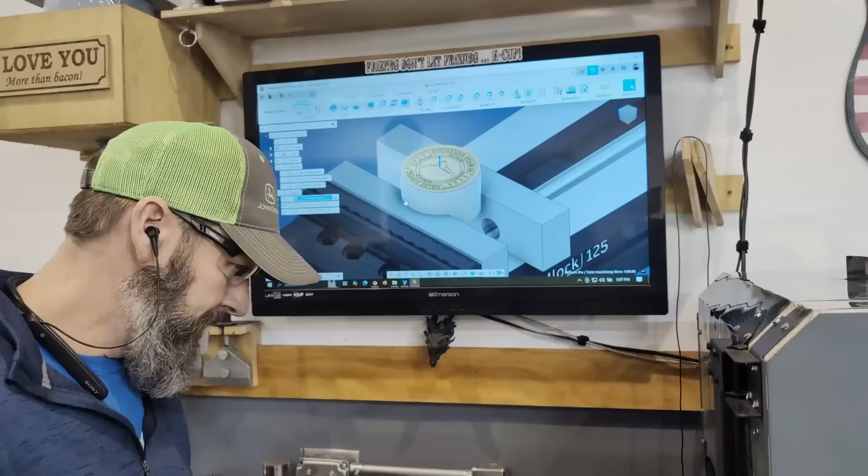Onboarding with Xometry. I'm giving Xometry a try. I'm just through those initial hurdles of becoming a partner, doing my test part, becoming a partner, getting onboarded, and I thought I would share my experience. I took a few notes, a few talking points, so I don't ramble on and waste your time. There's a few things here on the computer and some test parts that I want to show you that I think will be beneficial.

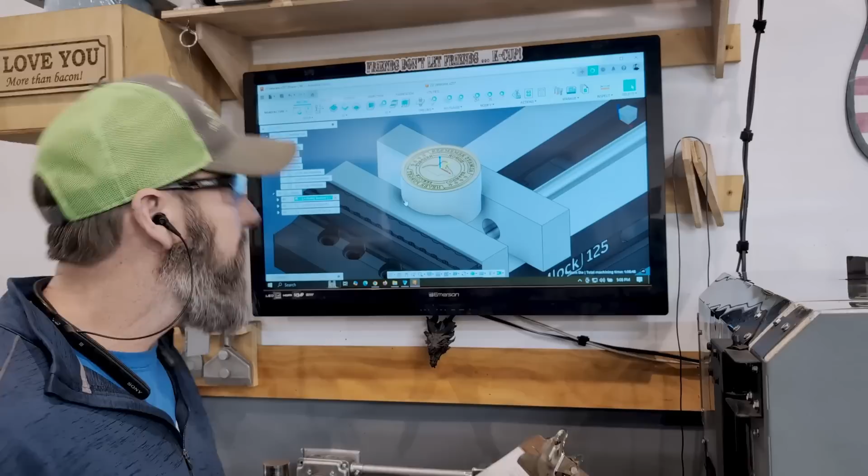So first part is signing up, the process. I didn't find that overly difficult. I just went to their website, xometry.com. Now, some people say Xometry, some people say Xometry, I don't know, it's one more syllable to say, so I just say Xometry and skip to the end. But yeah, I went to xometry.com, applied as a new member for 3-axis machining, and everything was very straightforward. I'm not going to go into the process.

It was very easy. Why? Well, at the time that I started this, I had a lot of available or free spindle time. I hadn't ramped up to now. So this was over the summer. I decided it was actually the same time I did 75 Hard. So I was gung ho. But I decided, I'm going to give Xometry a try.

I've got a lot of free time in the shop, and I could use that to make some cool parts and to make a little extra money. Fast forward to now, I'm in full swing. I feel like I've been forging and making things to sell in my Etsy shop nonstop since October. So that's why I decided to at least give it a try.

I've heard a lot of people say you can't make any money with Xometry. I've heard a lot of complaints, and it's really hard to believe what you hear from other people or on the internet unless you see it for yourself. There are always two sides to a story, right? And some people are successful with it.

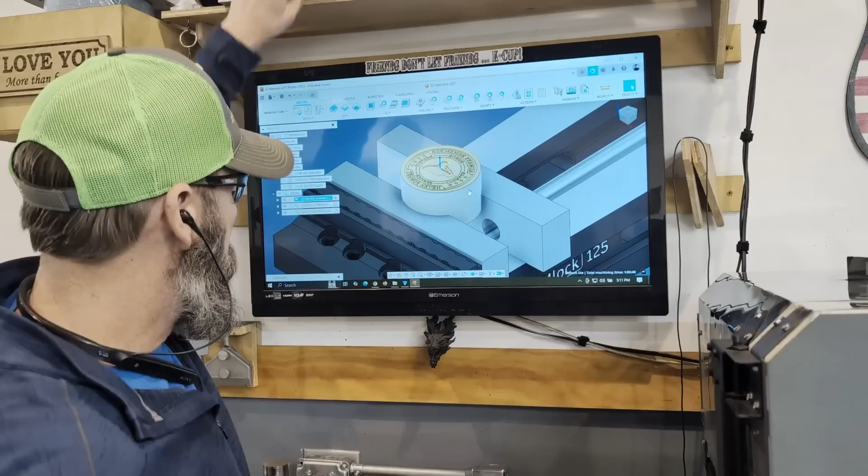So I was just testing out my speeds and feeds. This is a throwaway piece of aluminum I had. After that, I went back to my CAD and CAM and refined what I thought I needed to do with the process. Now, I think I have it up here.

There are some critical dimensions that they call out. This is the final inspection sheet. Green is good, by the way. That means I passed. This is the inspection sheet that they provided to me after I passed the part. So this is what the final part looks like.

And some of the critical dimensions are, for example, this is a through hole here in the center. That had to be, I think it was 1.188 inches, plus or minus 1 thou.

And then these are 1/4-20 cap holes, nothing big. That was super easy.

What I was really worried about was the roughness average, the surface finish called out on this part. I thought, well, if I get brand new inserts and really dial in my Fusion speeds, using a 50 millimeter face mill, 2-inch face mill, maybe I can get it. And I got it. I was a little surprised, but I got it. But I was really worried about this.

So this whole time, maybe let's think of this later in the conversation, but my biggest worry at the time was actually passing this part, getting the surface finish, and then all edges broken in the mill.

So you have to get a little creative with this one. There are several ways you can do that. I ended up going, I can't remember what it's called, I did a trace. Yeah, under Fusion 360, under the 2D toolpaths, I ran a trace. I think I ended up running it with an 1/8 inch or a 1/4 inch ball mill, because as that end mill is going and navigating along this contour, the tool geometry is going to change ever so slightly, and that was the least catastrophic. It still broke the edge, but I was able to dial that in. Worked pretty well otherwise.

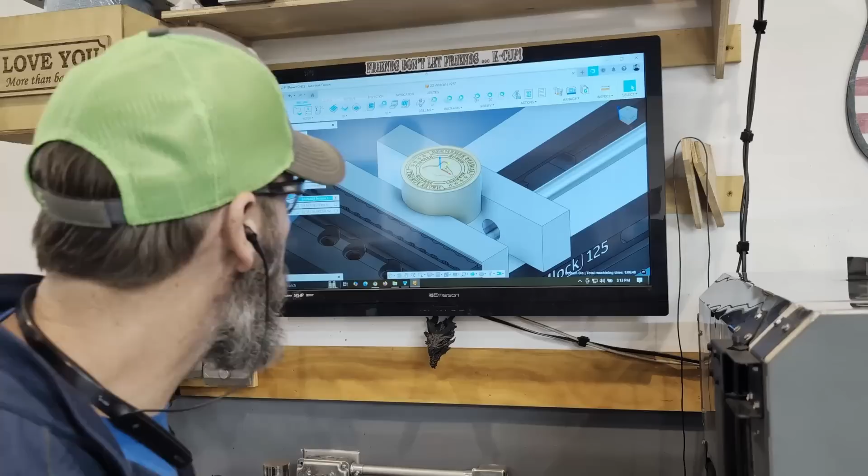And then on this particular part, I flipped it, put it back in the vise, and was just off ever so slightly. I just have just the tiniest little edge, and I hate that. I hate it when you have to flip a part and find it just perfectly. So that didn't work, so I had to come up with a different strategy.

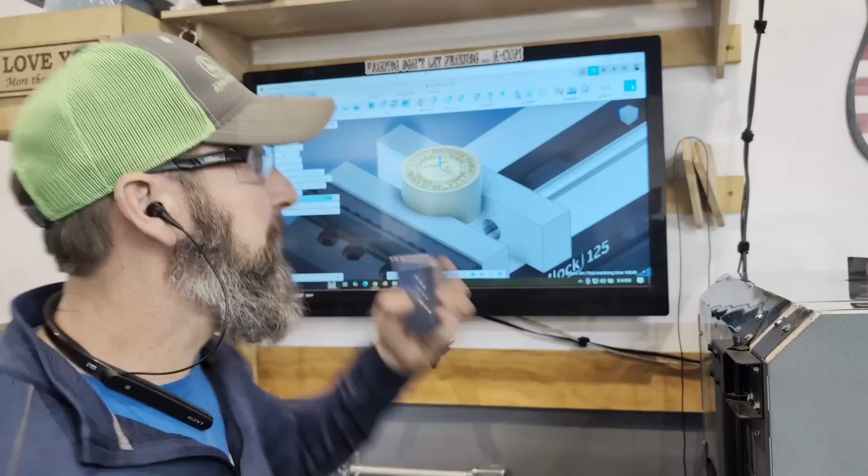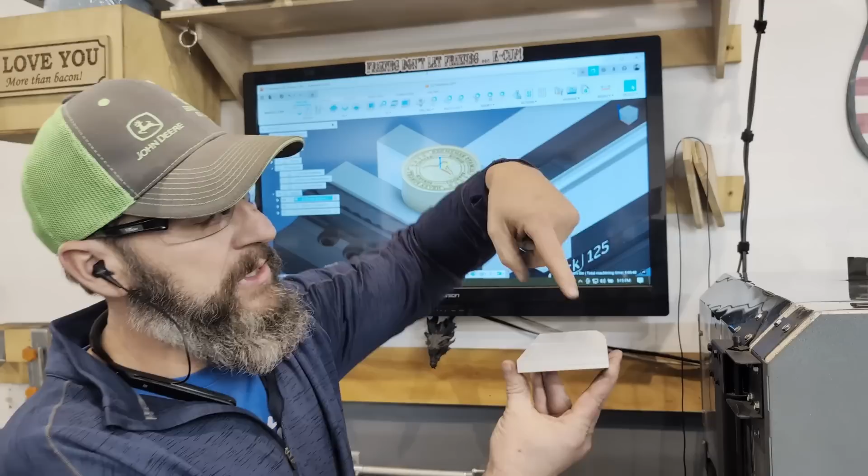I decided at that point—and this is actually when my probe broke, and I went to a Haimer 3D probe—I decided to do the whole feature, which is 1.5 inches tall, to get an end mill long enough to run all the way down, and then flip it. All I had to do was space it, and that worked pretty well. This time I got my hole just right.

Everything was perfect, except two things. When I flipped it, I put it on parallels in the vise. I over tightened it, and I kind of marred the finish. This surface finish is 125, so that would have passed. It would have been fine.

But then I learned something about my mill. It was either because I have a 30 taper, or because the end mill that I had was so long, I got a little bit of chatter, and I hated that. It didn't look good. So this one was done.

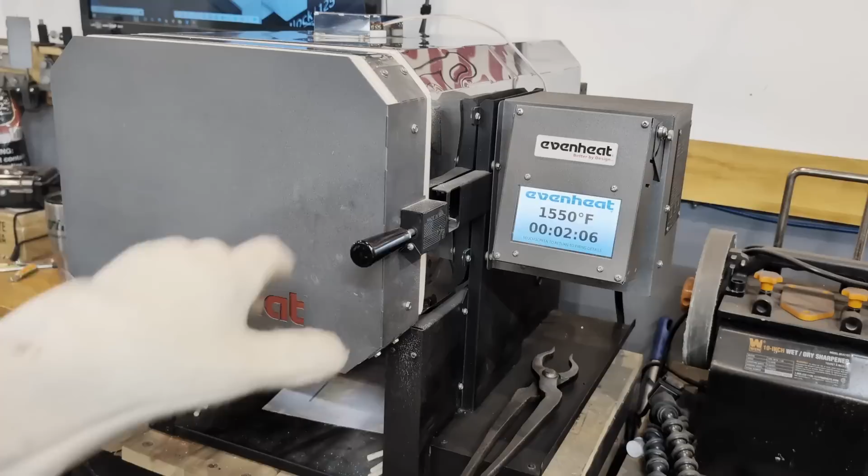It's been going at 1550 degrees for about 45 minutes, holding that temperature. We just need to quench this real quick.

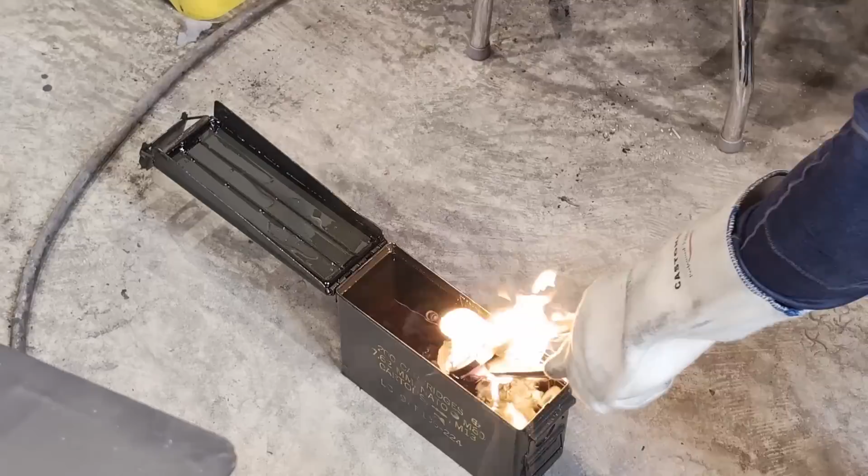Okay, and these are tool holders for my fly press—well, not my fly press, I already have my own tool holder. These are tool holders that are for sale that I'm making for fly presses.

And this is specialized quenching oil, a very low flame point, low smoke point, that I'm using to quench this. I've got this quenching oil in ammo cans like this, keeps it nice and contained. And if I'm careful, there's no spillage and very little cleanup.

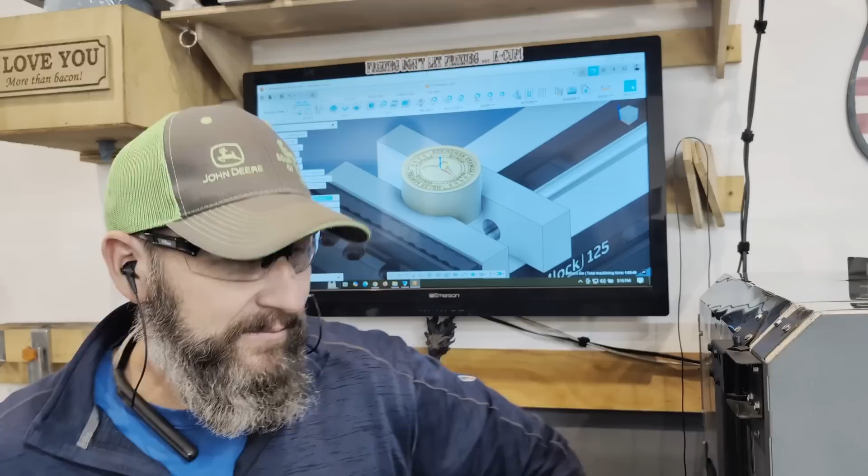Anyway, so I just decided, you know what, I'm just gonna block it. So I did make a block, get the dimensions exactly as you want, and then once this was a nice rectangle or cube, I threw it in there, did the top feature, did the engraving with my partner ID and the tapping, and sent it in.

So that's my story with the test part. I think if I wasn't so pressed for time, this would have been totally viable. Get just the perfect right tool length to cover this 1.5 inch, flip it, face it, and you'll be done.

I don't think that the test part was overly difficult. And now that I'm on the job board, comparably, I think this test part looks easy compared to some of the jobs that I've been declining and not taking. I think a key takeaway with these test parts is Xometry wants to find out if you can do your basic CNC operations. They want to know if you can do 3D tool pathing. They want to know if you can hit your tolerances, and then after the fact, they want to know if you can measure them and demonstrate that you can do a formal inspection report.

For example, this pin here, I believe it was the bottom edge, needed to be 1.5 inches, 2 inches, 1.5 inches - and then how do you measure that? Or this hole in this edge. I actually ended up setting this in the mill, put in a perfect size pin, using my height gauge, got a reference, offset up in Z, measured the pin, and then I could get my height there. I do have a surface plate, but I am missing some of the tools that someone would have in their metrology lab to get these.

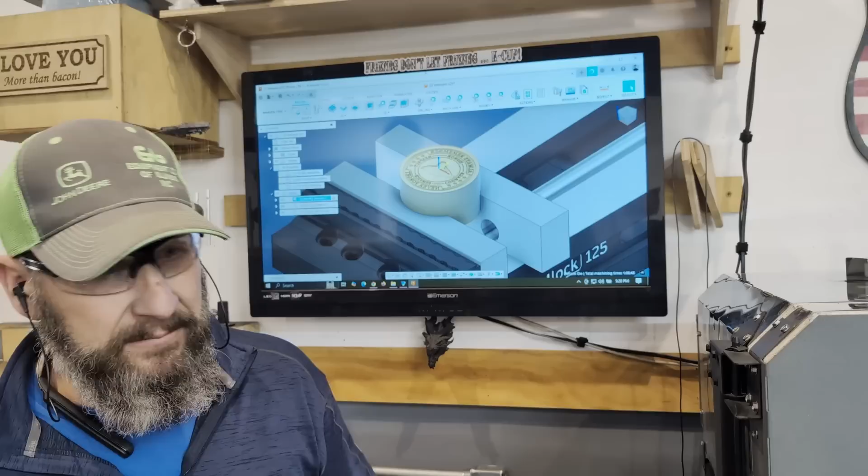So after I sent it in, when they got it, they sent me an email saying, hey, we got your part, we're evaluating it. And then a few days later, I got an email: I'm sorry to inform you, but you have failed your test part. And part of me was relieved - I'm like, fine, I don't have to deal with Xometry. I've heard these nightmares. Fine, I'll concentrate on my own gig.

And then this lady reached out to me and said, hey Garen, I'm the one that had to fail your test part. Your test part was actually really good, it was perfectly adequate, it was perfectly fine. You forgot, however, to put the paperwork in the box with your test part that included your partner ID. So I said, well okay, sorry, I did that, and emailed her the paperwork. I'm like, will this suffice? Here's the paperwork, here's my partner ID, here's the information you wanted. And then she passed me.

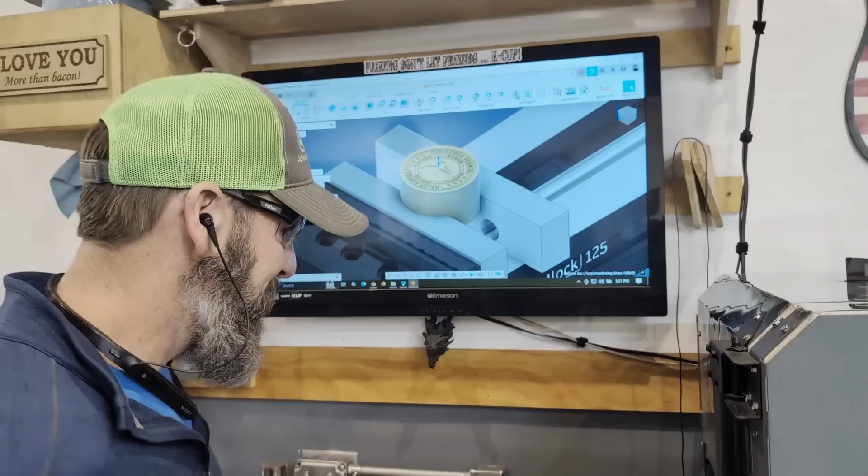So here comes the fun part. After I get this back, I was very curious because some of this stuff I can't measure - I don't own a profilometer. I don't own one, and I'm not willing at this point to go out and spend... I don't have the money to spend $600 or $2,000 on a nice profilometer. I want one for sure. I could get one of those cards, but even $100 for a little metal scratch card, I wasn't willing to do that. So I just thought I'll do my absolute best and send it in.

So when I sent mine in, I just said, listen, I don't have a profilometer, I just have basic tools. Excuse me.

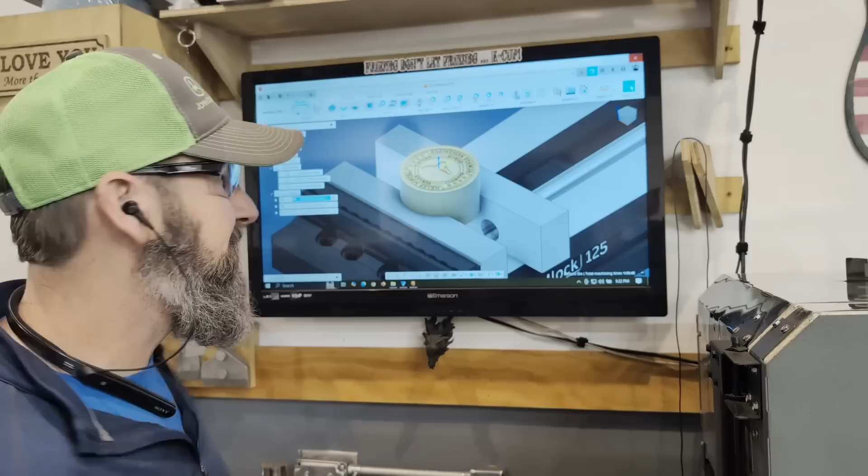Oh shit, did I close that? Sorry guys. Okay.

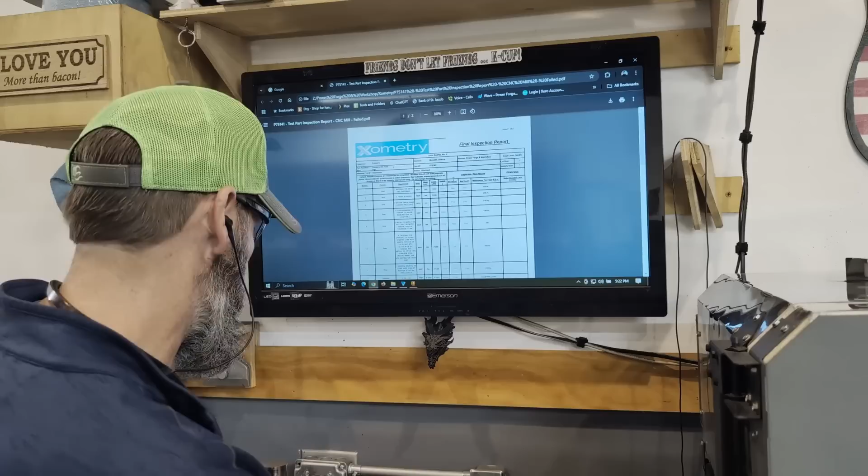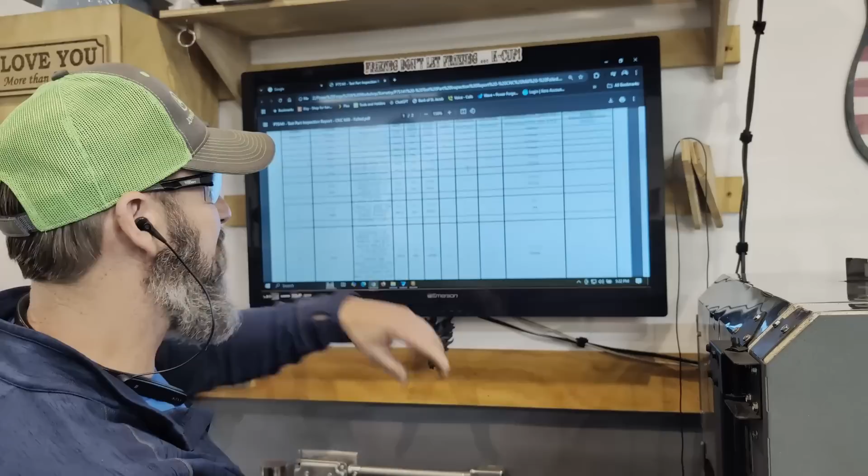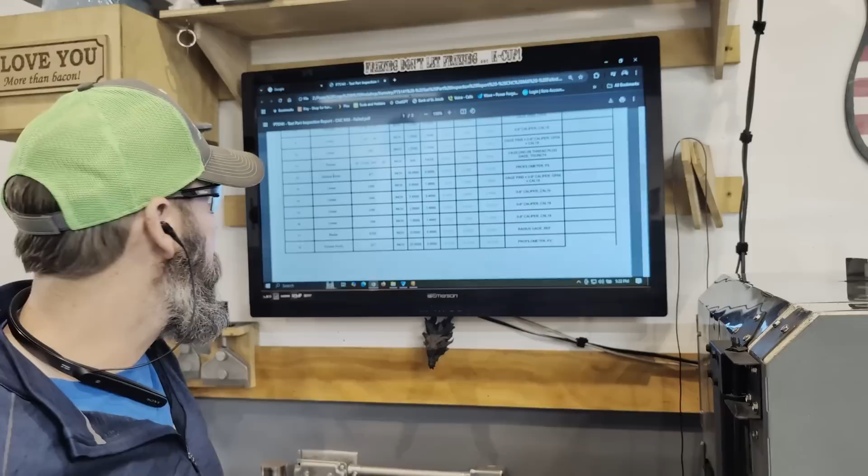So I passed this in Fusion 360. Of note, the things I was most worried about was the surface finish on the top of the part. It called for a 16, and I got a 3.5.

Not bad. That's not bad, using a 50 millimeter 90-degree face mill, I think it's five insert 90-degree inserts from Maritool, and I got a 3.5.

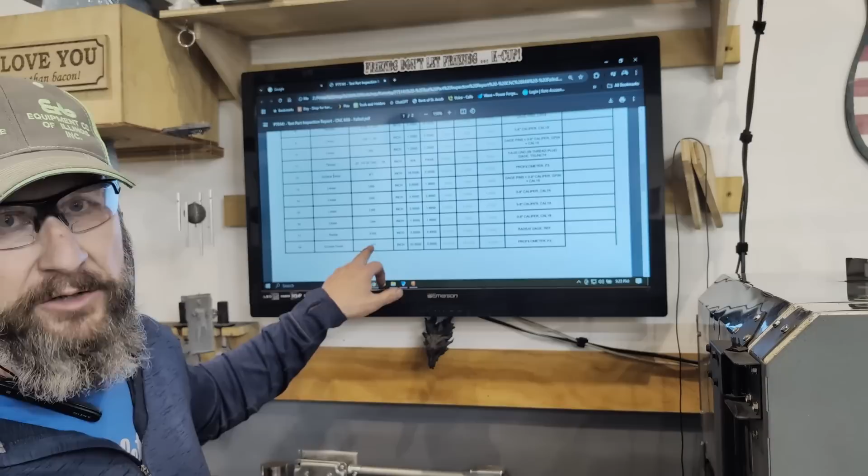Needed a 16. This slope I milled with a 1/4-inch 3-flute ball mill for cutting aluminum. They wanted a 32 surface finish, and I got a 14.07. So even that ball mill finish was good enough for the top.

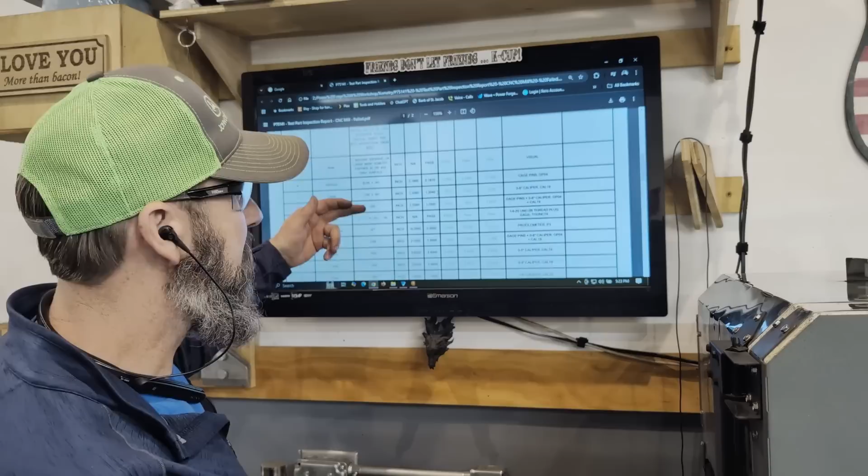Let's see, is there another surface finish? No, they didn't measure the other sides.

Okay, sorry, this video is getting longer than I expected. All right, so let's talk about the next part of the process.

After I had passed that part—well, failed, then passed—the next part of the process was an interview. The interview with Xometry was a Zoom call for me, and it was right here. I had my phone set up just like this.

They wanted to verify certain things in that interview. They want to look at your shop, verify that you've got the equipment you're applying for. I had my software pulled up with the part, just like this.

If I were to just say bottom line up front, was the interview difficult? I would say absolutely not. It would be very difficult to fail that interview. So that's not a stressor.

As long as you know what you're talking about—and it was just me, one-on-one—as long as you know what you're doing at that basic level, which is me. I'm not a super duper CNC whiz like some of the other guys out there, but I do know my basic 3-axis stuff, my basic machining stuff. I know enough to know that I don't know.

So in the interview, we talked a lot about quality management systems, QMS. He wanted to know if I had a QMS book. He wanted to know what I would do if I failed a part. Would I mark it with red tape and isolate it from the other parts? What are my protocols? I don't have a QMS book, by the way.

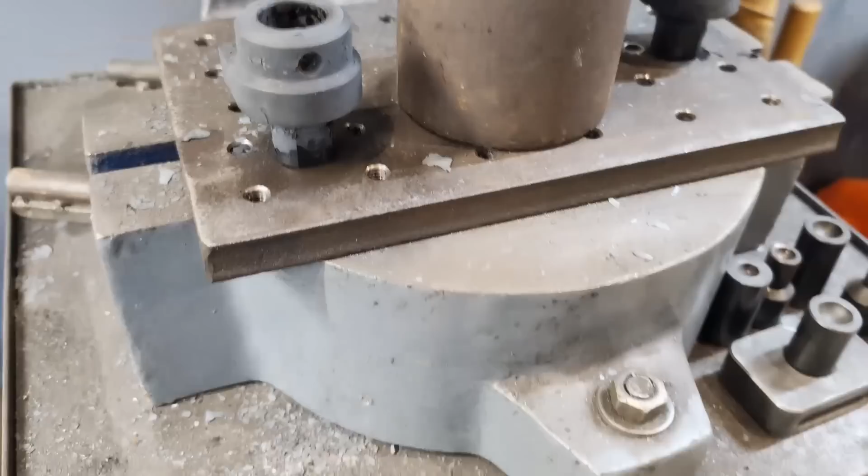To temper these bad boys up, these are the tool holders that we just heat treated. They look nasty now, but they'll clean up nice.